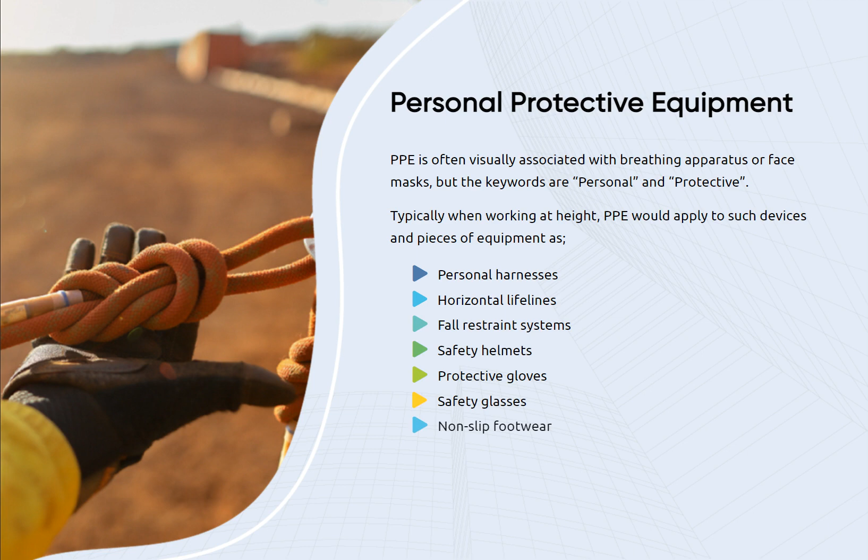Personal protective equipment, PPE. PPE is often visually associated with breathing apparatus or face masks, but the keywords are personal and protective. Typically, when working at height, PPE would apply to such devices and pieces of equipment as personal harnesses,

horizontal lifelines, fall restraint systems, safety helmets, protective gloves, safety glasses, non-slip footwear. It is important that PPE does not severely restrict a worker, but that it does keep them safe from harm and limit the possibility of injury.

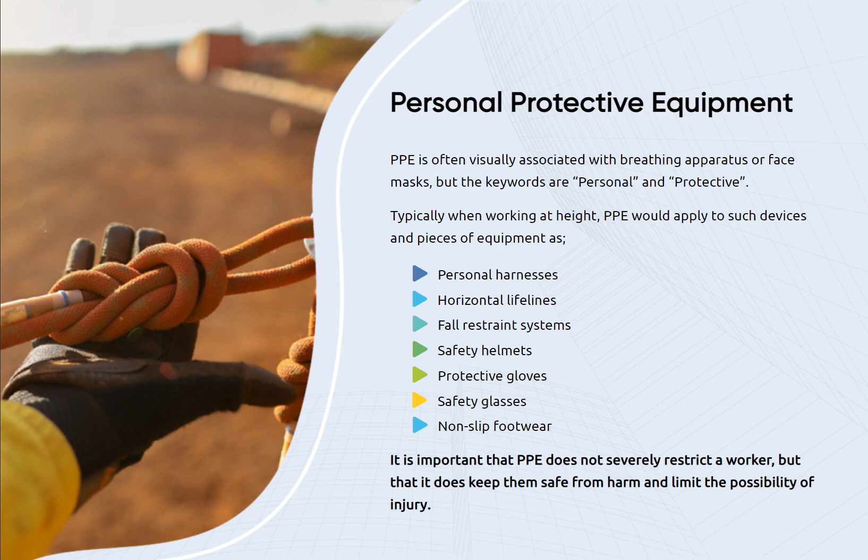Safe uses of the common equipment. Before using any kind of equipment whilst working at height, the user must be fully trained in the safe and appropriate use of it. The following tips are recommended with these common types of equipment.

Mobile scaffold. A mobile scaffold or mobile access tower must be erected by personnel or contractors that are fully trained and competent. It must be constructed with the recommended materials and stabilized with outriggers.

The wheels or feet of the constructed tower must be in full contact with a firm and stable surface, and it must be tested prior to full use.

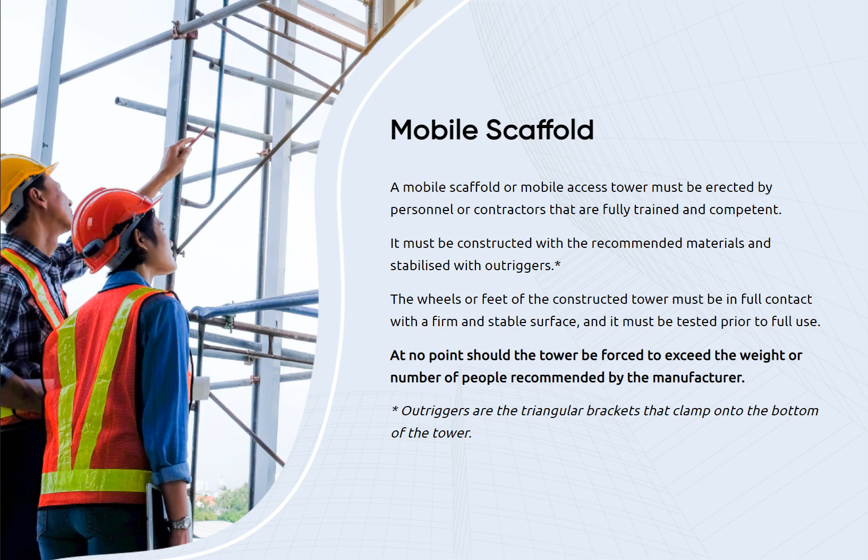At no point should the tower be forced to exceed the weight or number of people recommended by the manufacturer. Outriggers are the triangular brackets that clamp onto the bottom of the tower.

MEWP scissor. A MEWP, mobile elevating work platform, scissor is a powered vertical lift, which can be used for raising one or several workers to a significant height. It is known for being very stable and safe, with guardrails and a self-propelled system.

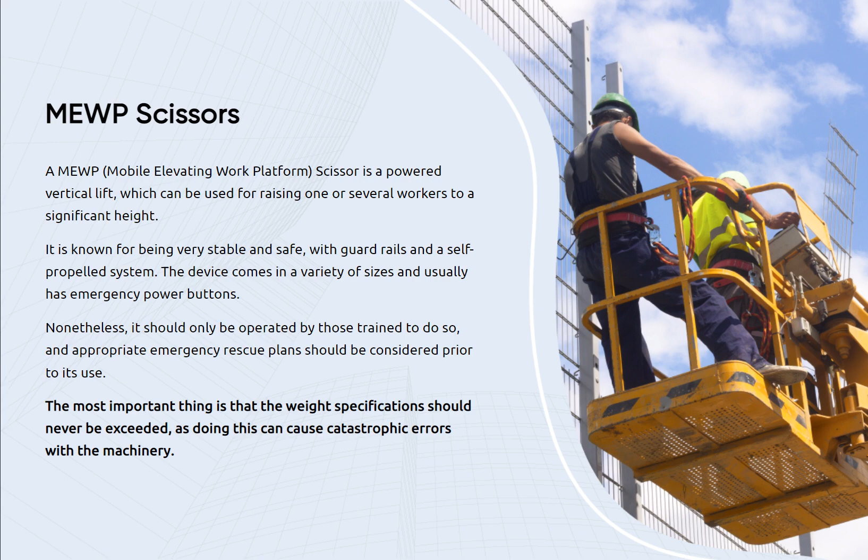The device comes in a variety of sizes and usually has emergency power buttons. Nonetheless, it should only be operated by those trained to do so, and appropriate emergency rescue plans should be considered prior to its use. The most important thing is that the weight specifications should never be exceeded, as doing this can cause catastrophic errors with the machinery.

MEWP boom. A MEWP boom differs to that of a scissor lift, in that the angled one-arm structure enables it to be moved in a three-dimensional way at height, rather than just up and down. However, this greater maneuverability comes at the cost of stability, and there is a greater risk of falling due to sudden movements or unexpected impact.

These are elements that should be considered during the risk assessment. Due to its relative instability, this equipment needs more space to operate than other types of ladder or lift. Like the MEWP scissor, it should only be used by those trained to do so, and never exceed its safe working load.

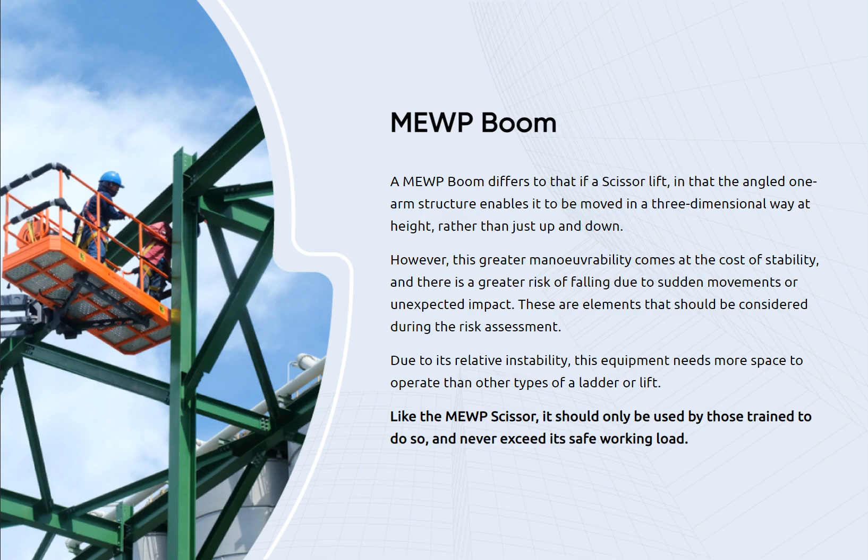Podium steps. Podium steps combine the convenience of a stepladder with the stability of a platform. They offer low-level support, with adjustable heights and sturdy guardrails. They can be folded or self-assembled depending on the model and can be safely used in corridors and office areas.

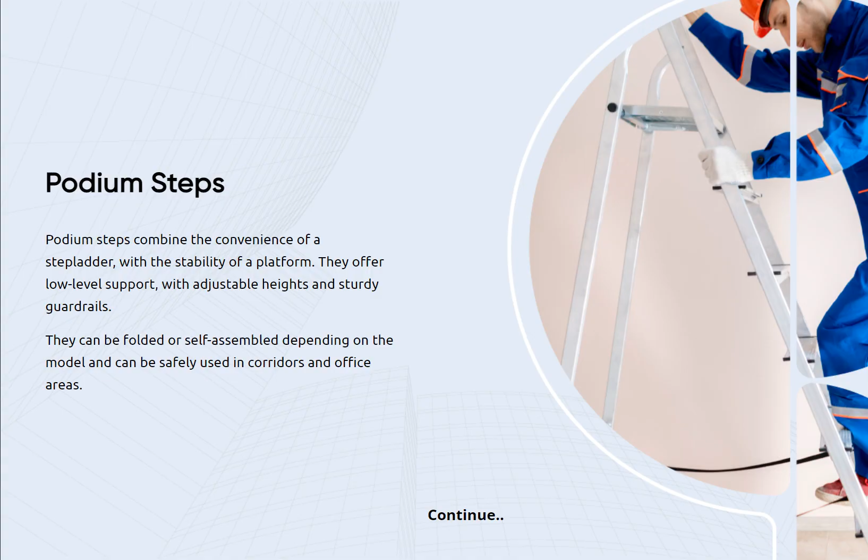The only real safety issues to bear in mind are that hinges and catches are locked in place prior to use. Tools and materials should be loaded onto the platform whilst at ground level. The gate should always be shut securely and locked before the work starts.

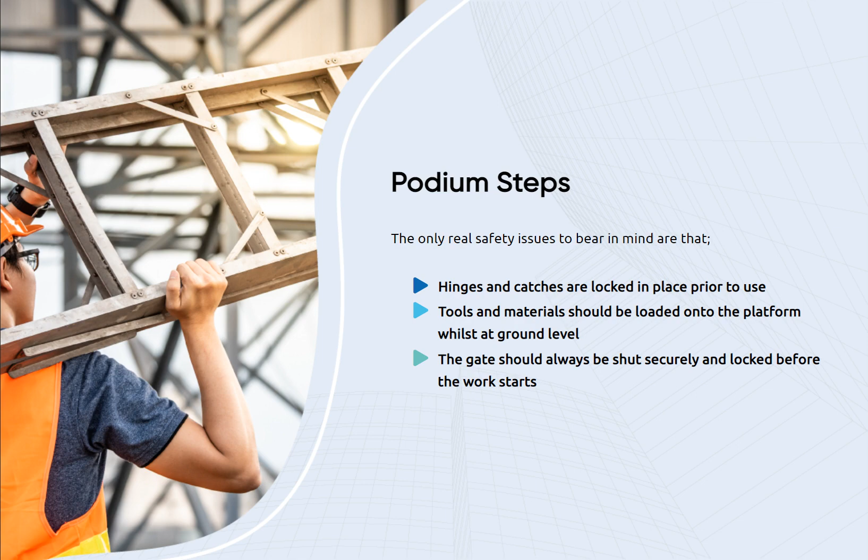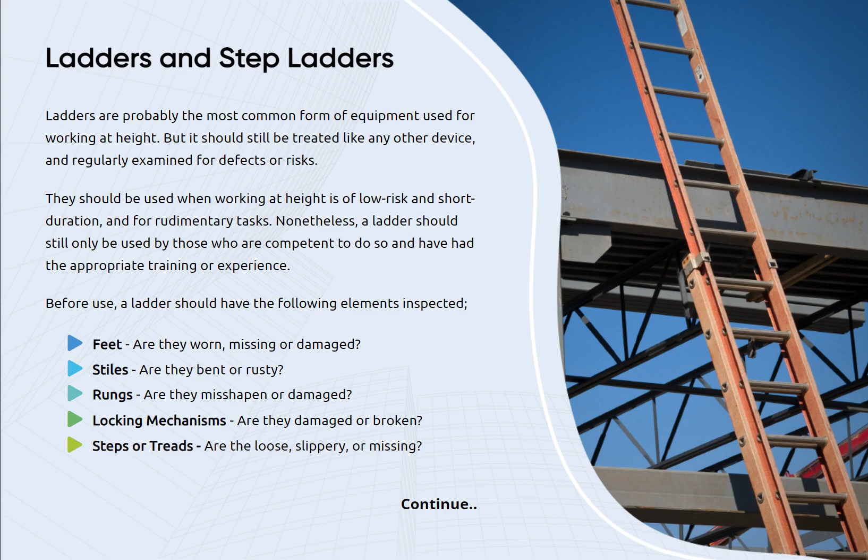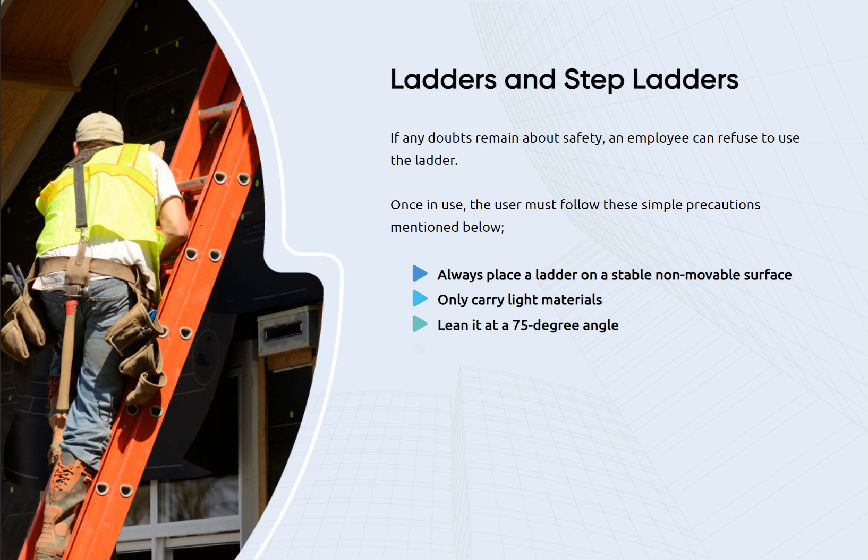If any doubts remain about safety, an employee can refuse to use the ladder. Once in use, the user must follow these simple precautions mentioned below.

Always place a ladder on a stable, non-movable surface. Only carry light materials. Lean it at a 75-degree angle. Do not work on the top rungs or overreach. Between your feet and hands, always maintain 3 points of contact with the ladder: 2 feet, 1 hand, etc.

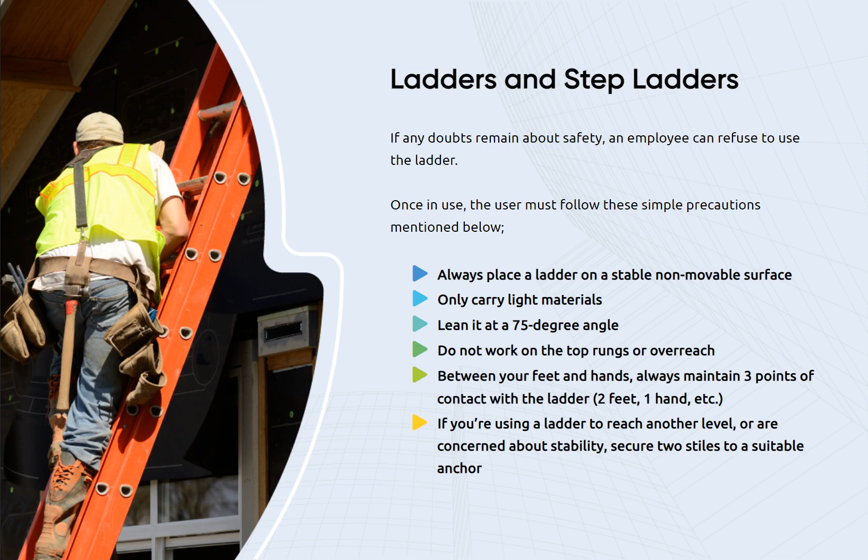If you're using a ladder to reach another level, or are concerned about stability, secure 2 stiles to a suitable anchor.

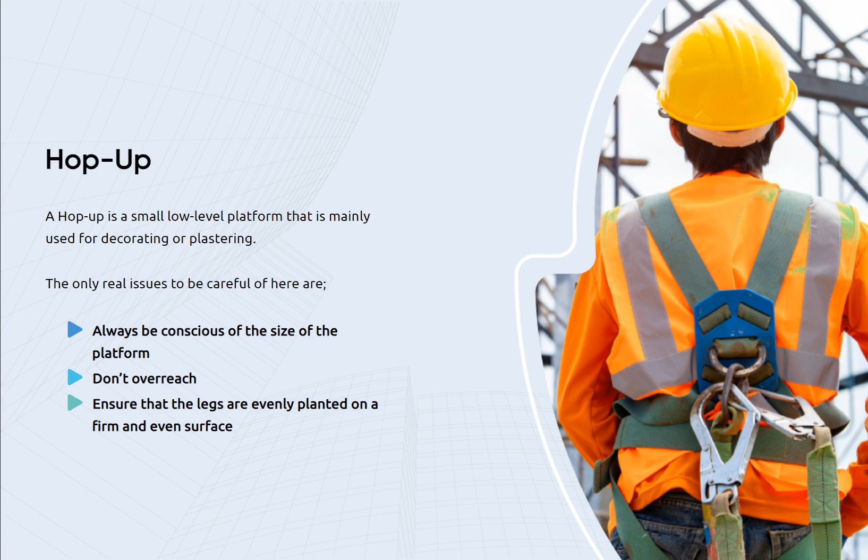Hop-up. A hop-up is a small, low-level platform that is mainly used for decorating or plastering. The only real issues to be careful of here are: always be conscious of the size of the platform. Don't overreach. Ensure that the legs are evenly planted on a firm and even surface.

Trestles. Like the ladder, the trestle is another piece of equipment best used for short-duration jobs. A low-level platform is mostly used for decorating or ceiling work. Strong trestles made of aluminium and steel can be used in conjunction with raised scaffolding if desired, and is deemed safe. The only real risk with trestles is the risk of falling from the platform edges.

If guardrails are not installed, a valid reason for not doing so is required. Otherwise, these should be in place to protect the worker.

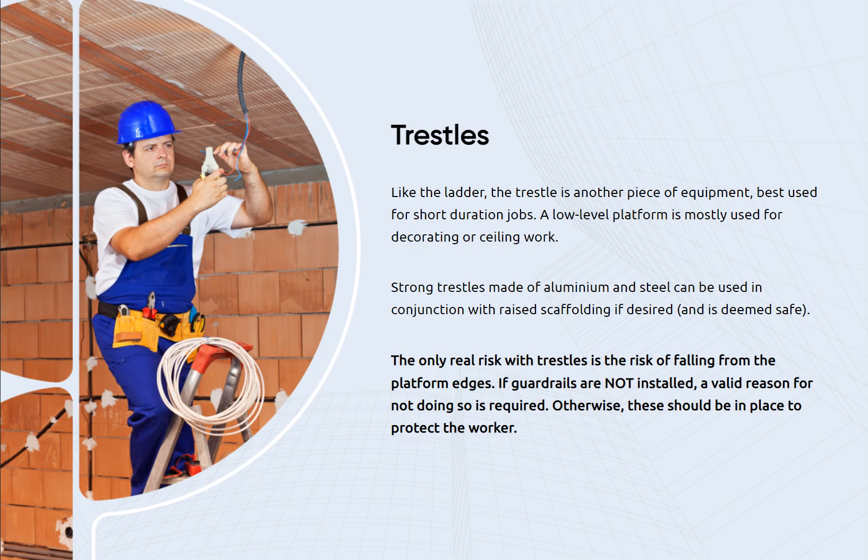Tubular scaffold. A familiar sight at any construction work, scaffold tubes can be constructed to provide sturdy support for pretty much any situation. However, it is important to follow these guidelines.

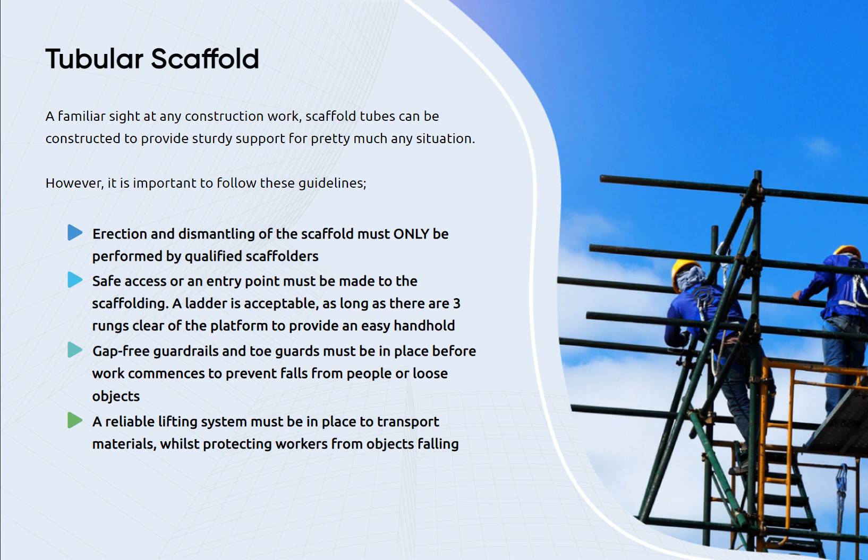Erection and dismantling of the scaffold must only be performed by qualified scaffolders. Safe access or an entry point must be made to the scaffolding. A ladder is acceptable, as long as there are 3 rungs clear of the platform to provide an easy handhold.

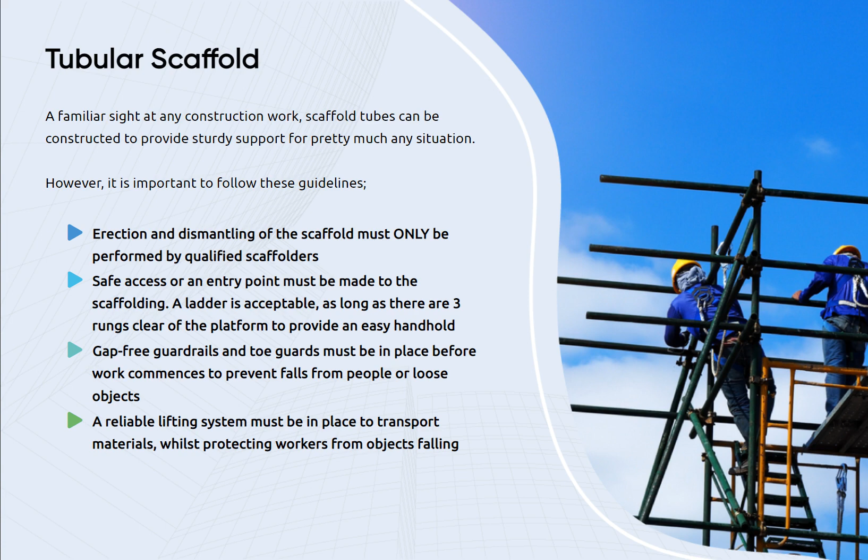Gap-free guardrails and toe guards must be in place before work commences to prevent falls from people or loose objects. A reliable lifting system must be in place to transport materials, whilst protecting workers from objects falling.

Inspection of work equipment. As we have covered in this module, individual pieces of equipment should be visually inspected carefully prior to use in working at height. The most obvious things to look out for are: damaged locking mechanisms, unstable bases or feet, rusty or worn hinges, bent or unstable handholds. These observations should be recorded, documented, and updated on a regular basis, including any equipment replacements.

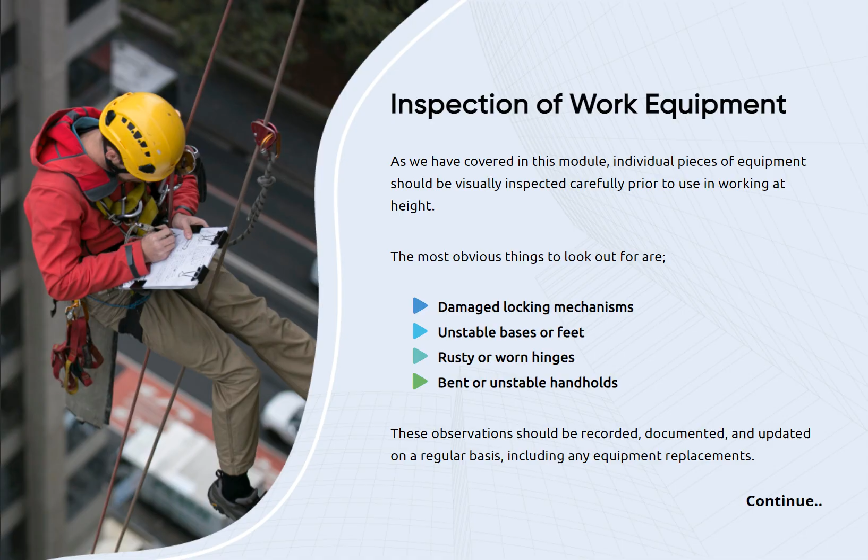Also, where platforms and scaffolding have been assembled, the following guidelines must be adhered to. A competent person must visually inspect assembled equipment prior to use.

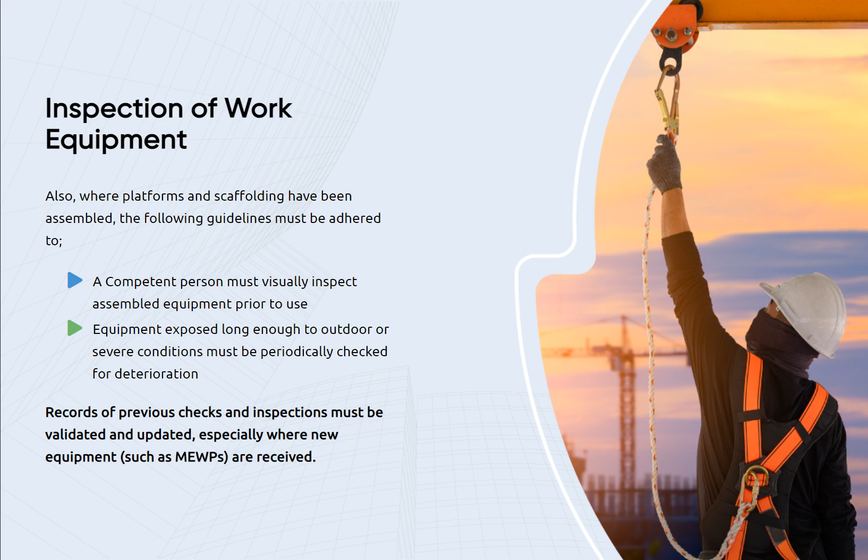Equipment exposed long enough to outdoor or severe conditions must be periodically checked for deterioration. Records of previous checks and inspections must be validated and updated, especially where new equipment, such as MEWPs, are received.

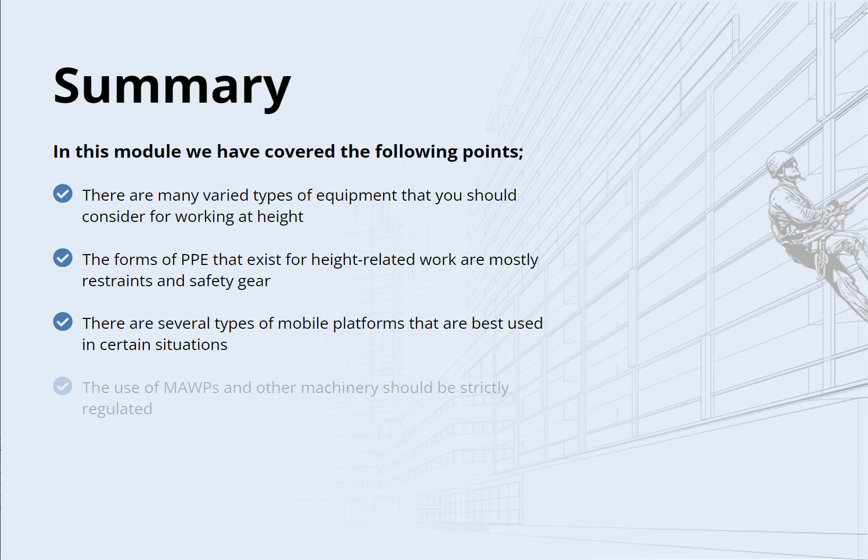Summary. In this module, we have covered the following points: there are many varied types of equipment that you should consider for working at height. The forms of PPE that exist for height-related work are mostly restraints and safety gear.

There are several types of mobile platforms that are best used in certain situations. The use of MAWPs and other machinery should be strictly regulated. Ladders and platforms need regular inspections as much as complex devices.